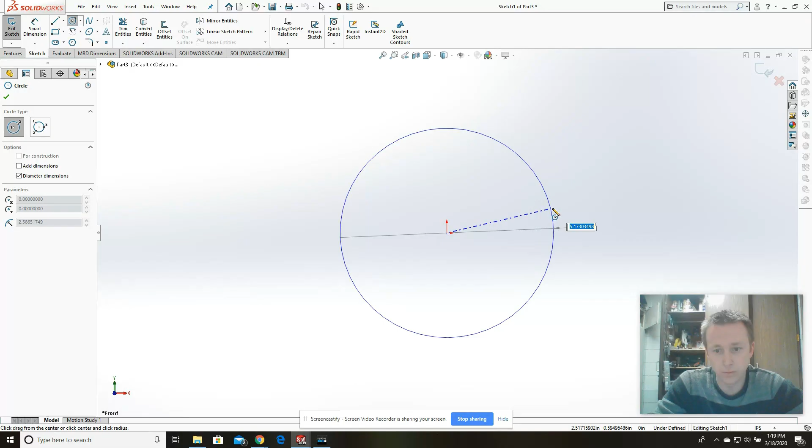I'm going to draw out a circle, then I'm going to dimension my circle because right now it's just whatever. I've already made the decision earlier what size I wanted this to be, and I went with 11 3/4 or 11.75 inches. Okay. Now that's going to change the size of my circle.

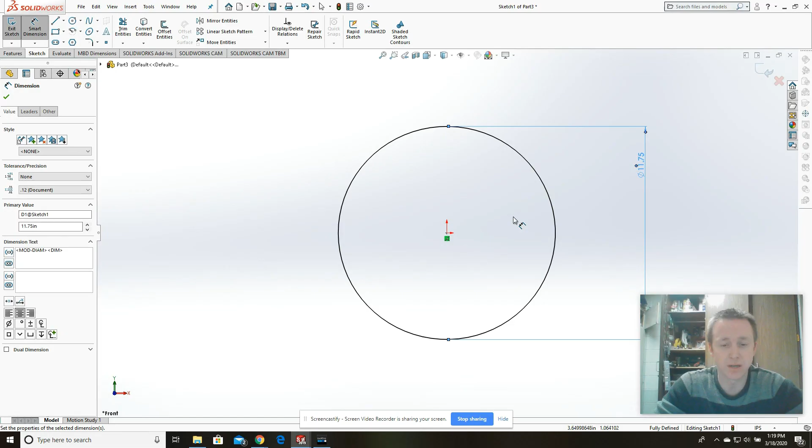I also am going to put legs around the circle, and to help me within this software program, I'm going to create construction lines. I'm not sure when I go to assemble my parts in here if those construction lines are going to show up, but I'm going to do it anyways because they're just lines to give you points of reference. They actually don't hold any kind of shape or value in the overall design of my product. So I'm going to go in here and create a series of quadrants actually so that it gives me a good sense of where my legs should be going.

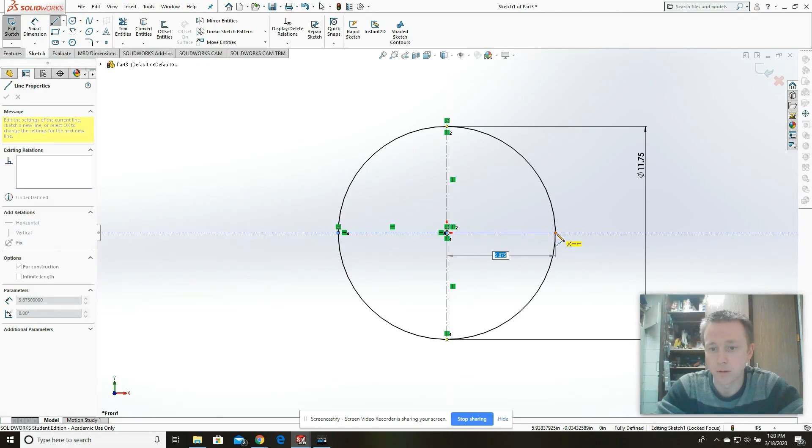Go here, right here. Try that again. One more. We should be good. Okay. All right, so there we have that. This is my 2D version. If we were looking straight down on top of our grill, this is kind of what it would look like. There would be bars going across here, but again, I'm not going to be putting those in for this drawing.

I totally could. Here, I'll just put a couple just for kicks here. I'll put one right here. And we'll put another one here. I'm not going to make it crazy.

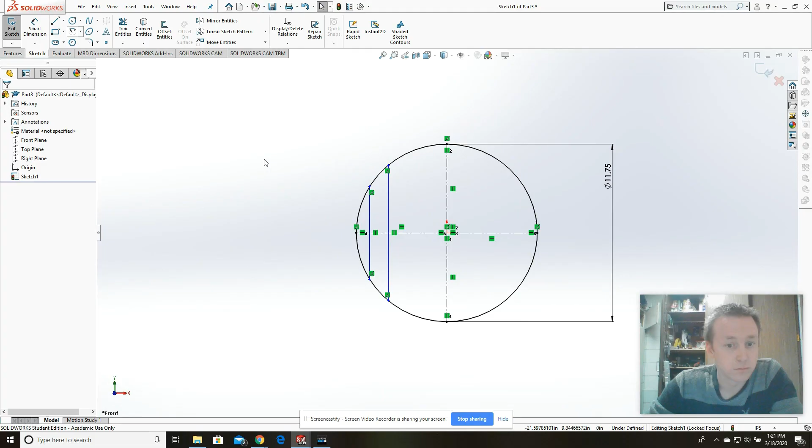And what I could do is smart dimension the distance here, and I want these lines to be, how thick should grills be? About 3/4 of an inch apart. Let's make it 3/4 of an inch apart. All right, and then I'll do the same for this one. All right, and then I'm just going to go down the line. Oop, there we go.

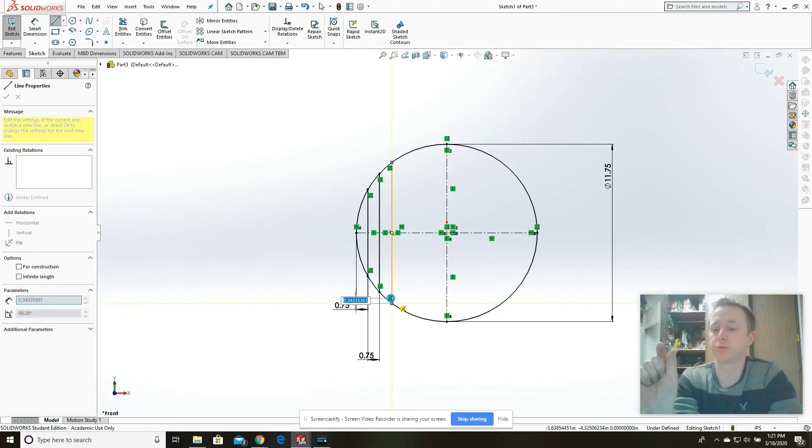Now there are a lot of quicker ways to do this. I can make half of this and then use the mirror function to get it to reach across, but I'm not going to do that right now. I'm just going to zip out these lines. My screen went black, but that's okay.

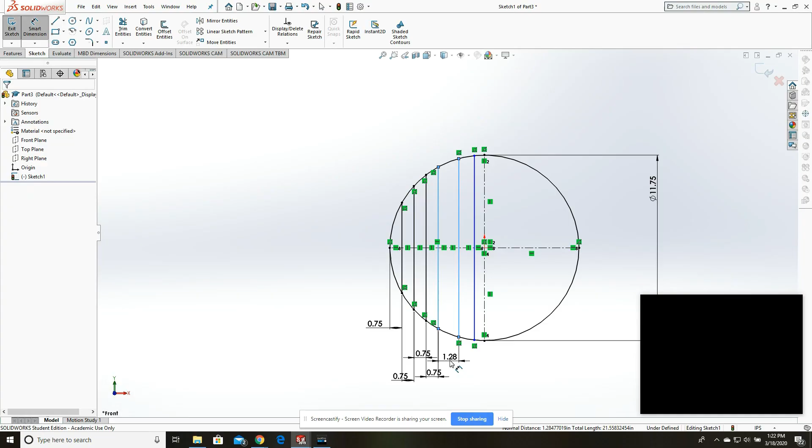I put the bars across. Like I said, I wouldn't, but I changed my mind. Went 3/4 of an inch all the way across with some lines, and then I ended up with something a little less than 3/4 on the end. That's okay. So I'm going to be done with this part.

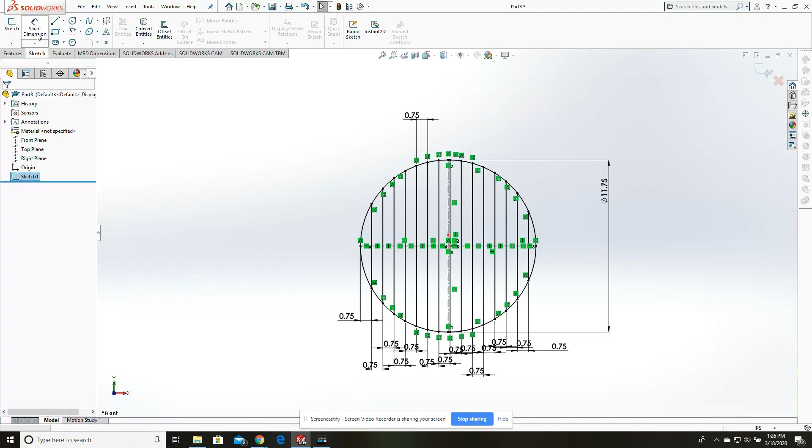However, this is just 2D, and I want to make it 3D. So I'm going to exit the sketch real quick right here, and then I'm going to give it some thickness. How we do that is we go to features and we extrude the shape. So as I'm here, we have everything highlighted, which is fine. I'm actually going to give it a dimension of 3/4 of an inch.

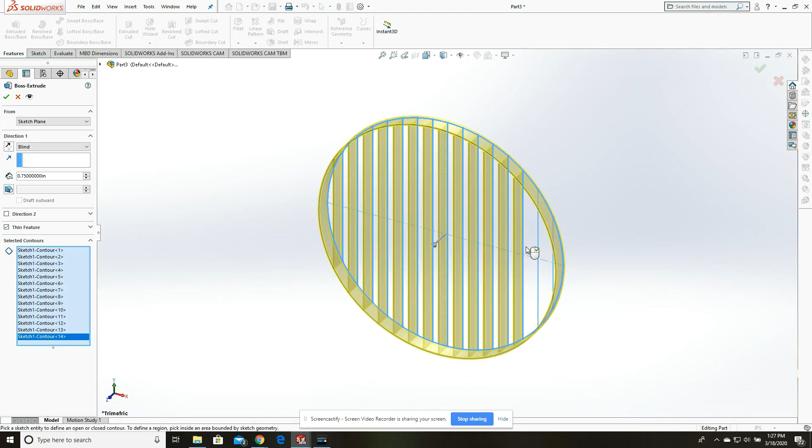Let me select all these here. So they all go to 3/4 of an inch. I believe my metal that we'll be using is 3/4 of an inch, but I'm not going to change its thickness or width, so it'll give me a good representation. So there's that. Check that off, and then we're left with basically a grill top.

Nice. I don't see my construction lines on here, so that's kind of irritating. Hopefully I'll be able to draw some construction lines later so that I can put my legs on in the right spot in this digital part. So

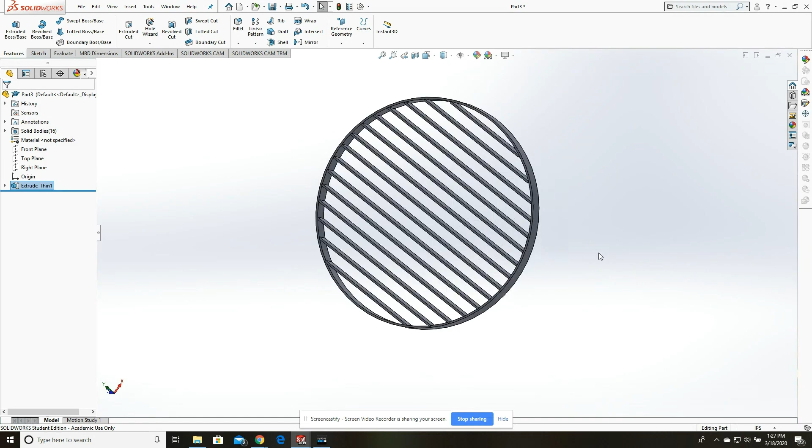And then we know how to make some legs. I'm going to have 4 legs on here, but what's nice is they're all going to be the same. So all I got to do is make one part, because when I put it together, it's just a matter of copy and pasting. So this gets a little bit different how I'm going to do this, but just follow along and you'll see.

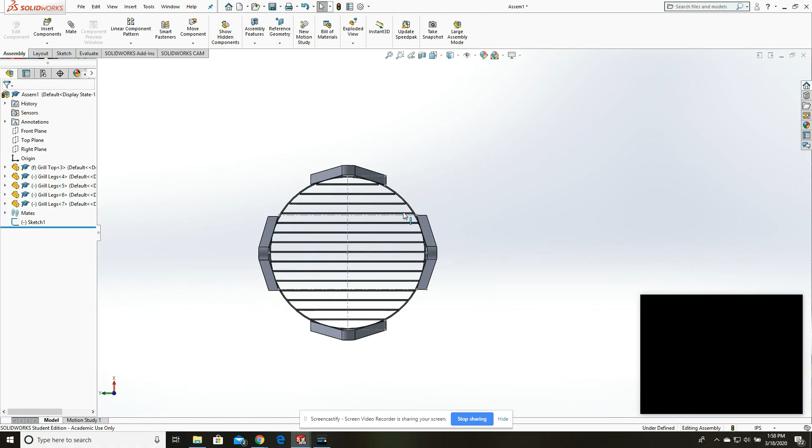I messed around. I brought in some construction lines to tell where I needed to put my legs. And now what I'm dealing with is my grill. It's pretty much put together on how I'm going to do it. Now in SolidWorks, it makes it really difficult. But when I build it, it'll be a lot easier than SolidWorks in my opinion. But

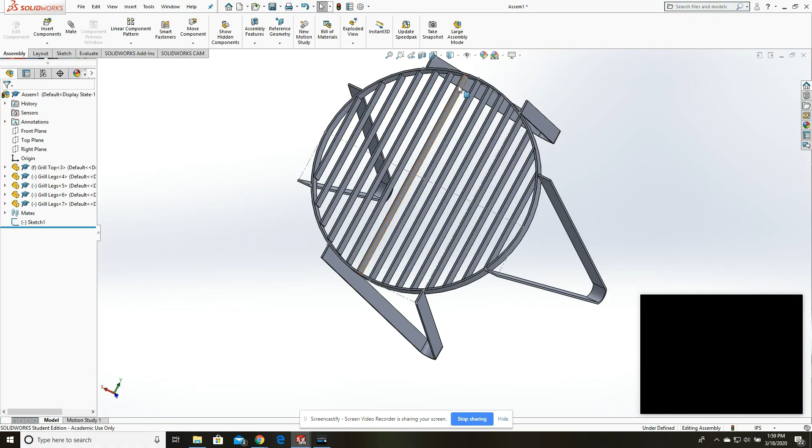otherwise, I'll probably add a handle in here or something on a set of these two legs, and maybe I'll put a couple of them or all four of them and just attach a handle. It'll look better and it won't look so goofy. But essentially what I was doing is I wanted to have this to create a drawing. So what I'll do is I'll make a drawing from this assembly. We want this. Okay.

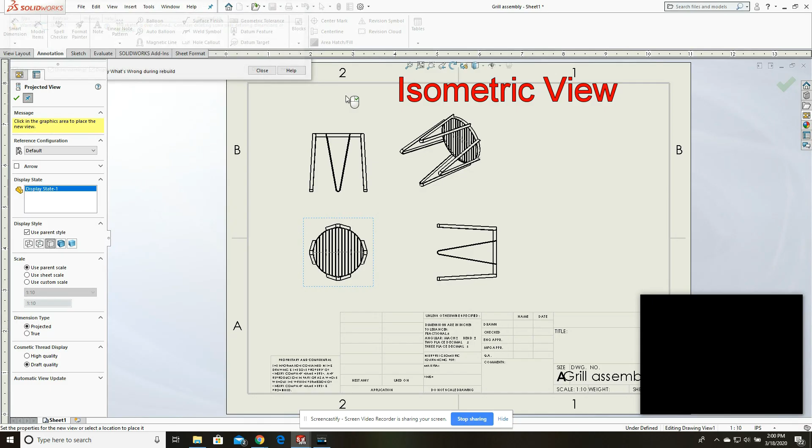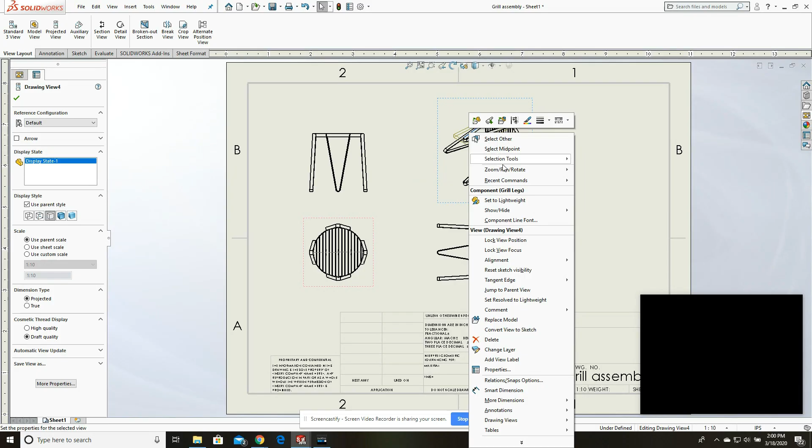Here we go. So what I'll do is I'm going to bring in some different views. This is called an orthographic drawing. A lot of you should be familiar with this, but basically it's a 2D drawing that gives you different angles and perspectives. And then this fourth one up here is an isometric drawing, which I don't like how this is orientated, so I'm going to rotate that. It shouldn't be too hard to do. Actually, can we find the rotation somewhere in here? All right, we'll just leave it at that.

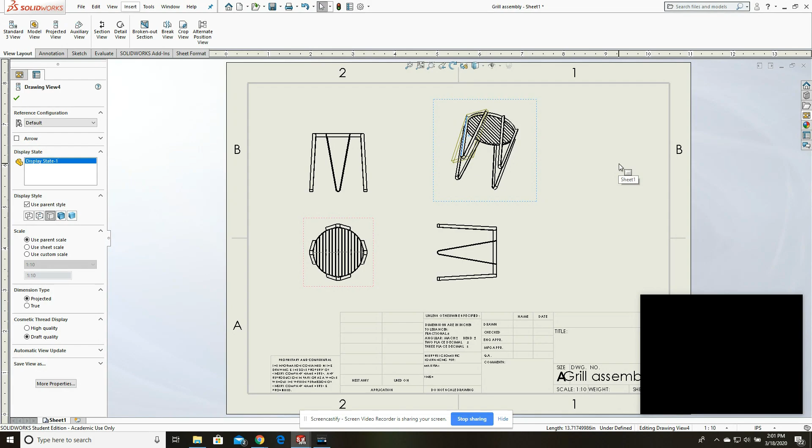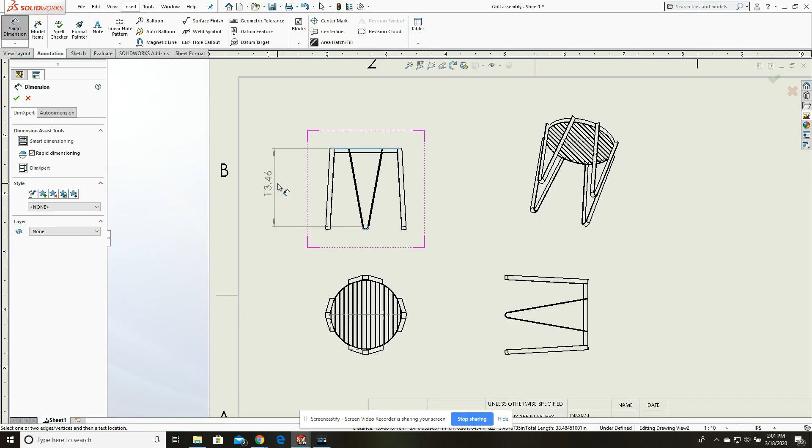So here's my grill. All right, now with this drawing here, I'll be able to add in some dimensions, and it's the same way as if we added smart dimensions. I'll be able to click on wherever I want it to measure from, like this top part all the way down to this bottom part, pull it out. So I got 13.46. Oh, looks like it's not pulling from the actual bottom. I wanted it to be 14 inches. So let's try this again. Go to the bottom here. There, 13.5, so pretty close.

Knowing the diameter is a pretty important thing, so 11.95. All right. It's nice that I can come in over here and override these values. This diameter is supposed to be 11.75. See, and the value changed there. I wanted this to be 14 inches, so I'll override what it's telling me. 14 inches. There's always a way around it here in SolidWorks.

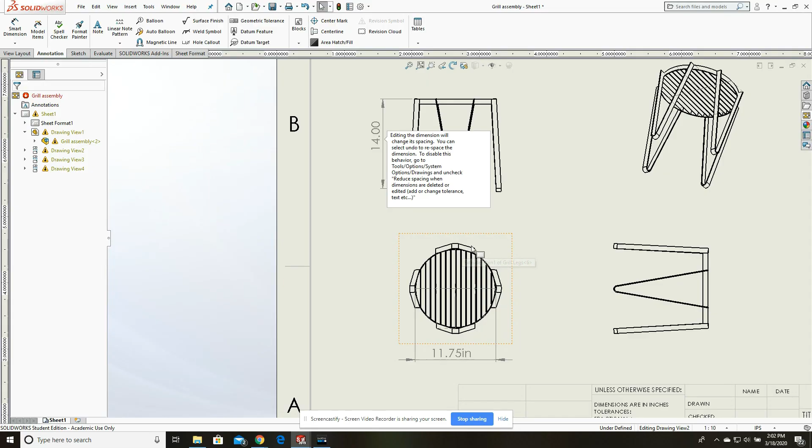And then my legs, I'm pretty much going to bend them to fit and make sure they're all bent the same. And that should be good. I guess I'll get my overall width too. I guess it should.

All right, everyone. So I have my plans here for my grill. I'm going to make it. I'm calling it the Campfire grill. I didn't really go into depth with SolidWorks. I had some trouble, as you can see. It's just one of those things with SolidWorks. Never built it before, so I was kind of learning about this circle, and mating these parts made it kind of difficult. But I was able to figure it out to get my shape and make it symmetrical on what I wanted to do, and all that.

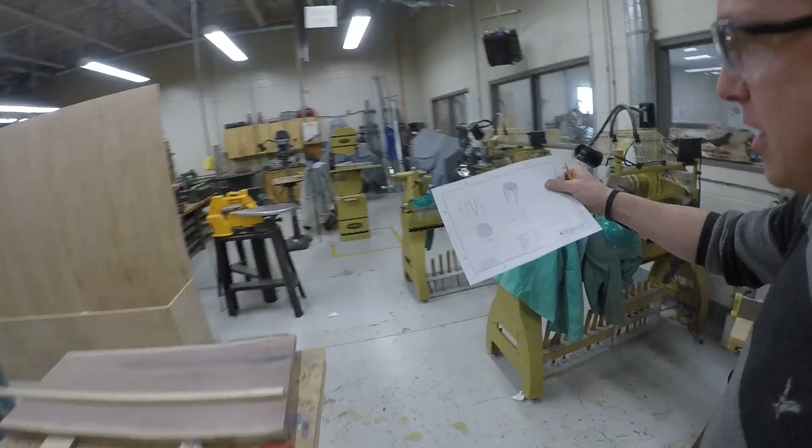So I get the general idea. There are not a lot of difficult parts on here, so the SolidWorks, yes, it helps. I just wanted to give you an example of pretty much how we do that. But another example, you see this giant middle school trophy case, and this is where SolidWorks plays a nice hand in that. And I'll be going over this project eventually sometime with all this online stuff.

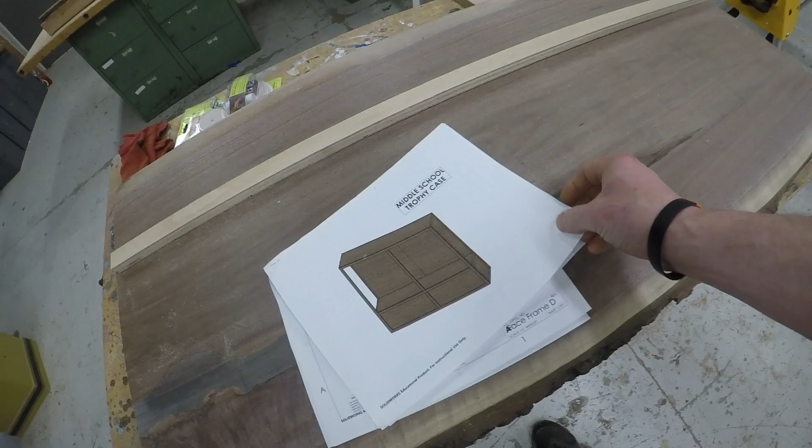But if you look, here I have, you can add skins to it, and then I have it broken down in different assemblies, giving you all these little nooks and crannies, squares, I have it all defined. Here's the casing, here's the face frame, and it just keeps going. And then every page is a part that needs to be built for this. It's a little more intricate, it has a lot more parts than this grill. But that would take a very long time to put in one of these videos, so I won't do that to you because I know that that SolidWorks part was probably a little stale for you.

But so here's the deal. What I'm gonna do is I'm gonna create this grill, and you're gonna watch me create it. So pretty much what I'm gonna start off with is the main part, the grill. The main part on that is creating a circle out of metal, and then we're gonna weld those together. We'll create all the crossbars, which is gonna be a lot of cutting, a lot of welding, and then I'm gonna create the feet for it, which actually is probably gonna be the easier part of the project. So, there we go. Let's go select some material.

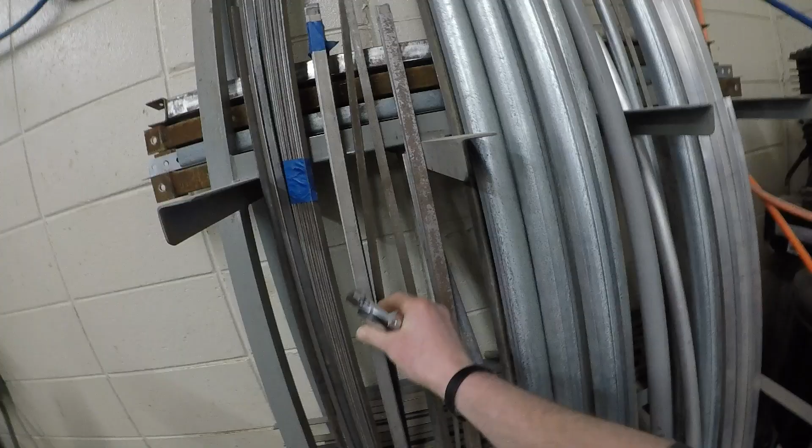All right, here I have a lot of metal material to choose from. Obviously, I'm not going to use these giant 50-foot, well, it's 50 feet worth of metal pipe, galvanized. Don't really want to work with galvanized stuff. It's toxic if you weld it, so I don't want to mess around with that stuff. But I do have a lot of these mild steel strips. Some are thinner than the others, but I have a lot of this stuff right here. And this actually, when I was looking at it, I wanted 3/4 of an inch. I'm gonna take this caliper here and try to figure out.

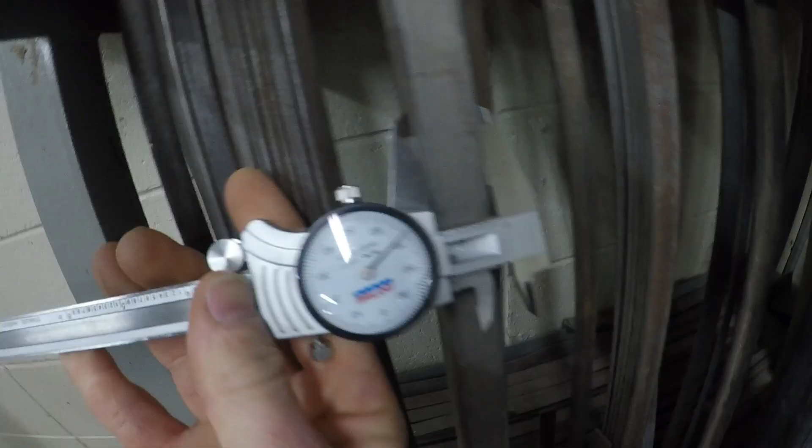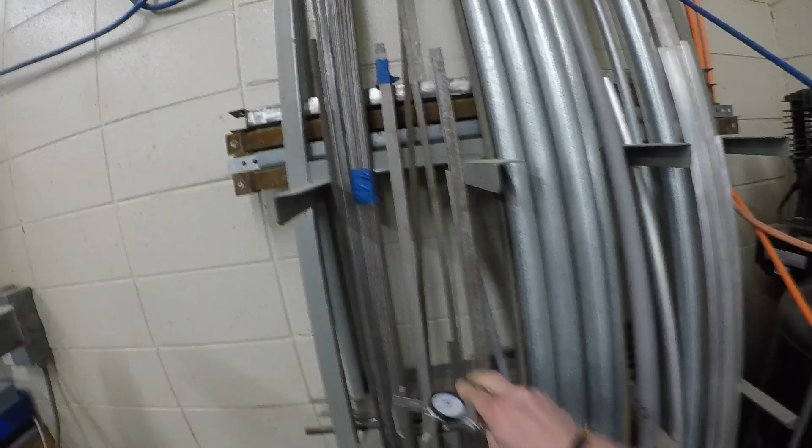Alright. And that's pretty close to 3/4. It's a little bit more. It's about 20 thousandths bigger than 3/4. And I'm not getting an accurate measurement with the camera here. But this is my material. It's a little thin, but it looks like grill material to me. So we're gonna bend up this stuff. We're gonna make the legs out of this. We're gonna make the grill piece out of this.

So this is 3/4 inch, 22 gauge, or I'm sorry, 16 gauge mild steel. So it's easy to work with. I'll have to treat it and rub it down in order for it to be used as a grill. You don't just want to use anything as a grill in case there's hazardous chemicals on it. But pretty much I pulled some aside. I have some right here, and we're gonna make our circle.

Here we go. All right, so I have some material here. I gotta find out how long do I need, or how much material do I need to create this circle. Well, one thing is I know that I want my circle to be a diameter of 11 and 3/4 inches. And I lost my tape measure. I'm gonna go grab my tape measure.

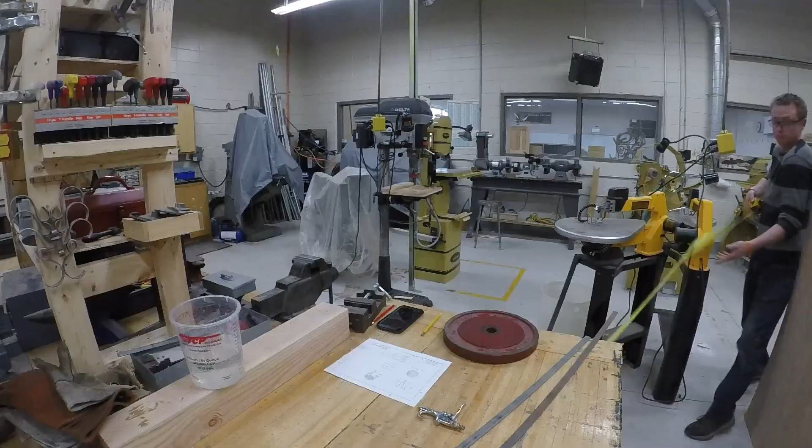All right, got my tape measure. Usually you don't use this for metals, but I'm just trying to get a rough estimate of how much we need. I'm actually gonna cut the metal longer than what you'd actually need. So I found this weight here. It's 25 pounds, and I'm gonna use this as kind of my template to create my circle.

What's nice about it, it's 11 3/4. So I'll be able to wrap, and I'm gonna use a hammer, and I'm gonna bend this metal all the way around it to create a nice perfect circle to shape it. So this is a part of metallurgy, is shaping metal, bending it to get a desired design or shape. But I need to know its circumference. I know its diameter, that's helpful, but what's its circumference?

Math. I gotta think way back. Math. Oh, I know. The circumference is equal to 2 times pi times the radius. I knew I'd remember that. So, all right. I'm gonna use a calculator to figure that out, but if I take this and I take the radius, which would be 11.75 divided by 2, that would give me 5.875, which is 5 7/8.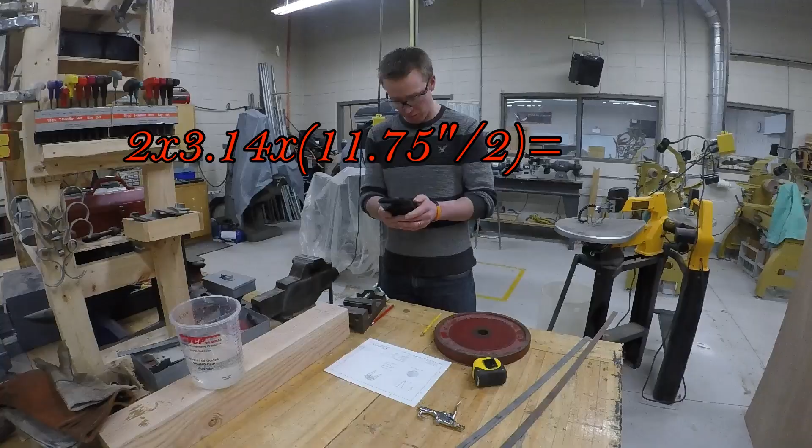So I would take that, I would multiply that by 2, and then I would multiply that by pi, I love pi, and that gives me a circumference of 36.9 inches. So let me write that down, 36.9. I'm gonna test that out. I'm actually gonna tape my flexible tape here, and it doesn't like to bend all around things, just one bend, so it might break. It has some points of breaking around here, but I just wanna see how close I am and show you that math works.

I said 36.9, I'm right at 37 inches, so that's pretty cool. I don't have to break my tape measure to figure it out and get a rough estimate, because that's not an accurate way or precise way of measuring. Math is. So 36.9, great. I need at least 36.9, I'm gonna round that up, 37 inches of material in order to create this circle. So, got plenty of stuff here. So let me readjust, and you'll see me cut this up.

All right, so I made a mark at 36.9, 37 on my metal here. And what I'm gonna do is I'm gonna use this scribe, which is what you use on metal instead of pencil, because pencil doesn't show up. And then I'm gonna use this cute little square. Yes, it's not a square, but it's part of a square, and it has a 90-degree angle on it. The method's called scribing. I'm gonna scratch a little mark on there. And then that'll help me see where I need to cut this thing. There we go. So let's take this over to the bandsaw, and we're gonna cut it.

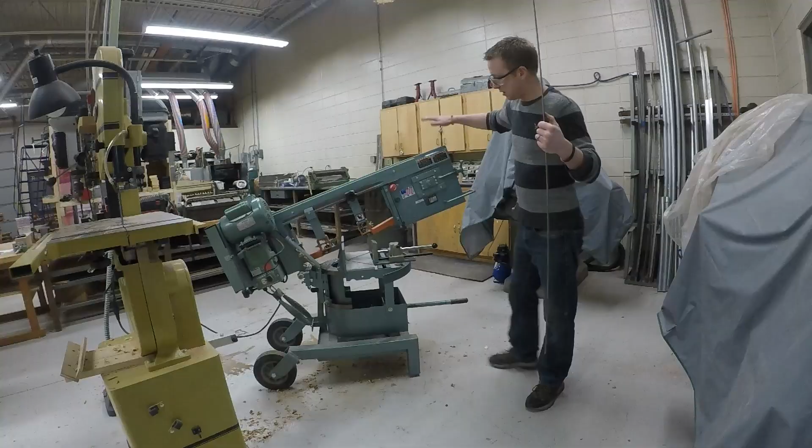All right, this is our horizontal bandsaw. It's an awesome machine. It's got a really thick blade on it. It's like bandsaws, where it has two wheels and a big band saw blade on it, but this is horizontal. And this is not like your vertical bandsaws where you can cut curves and angles and different things. This here only cuts kind of like a miter saw. It can only cross-cut things or cut them straight on. There's no turning around or creating curves. I can change the angle where I can cut what's called a miter cut, but in this case I just need a nice square cut, so I'm going to use that for this.

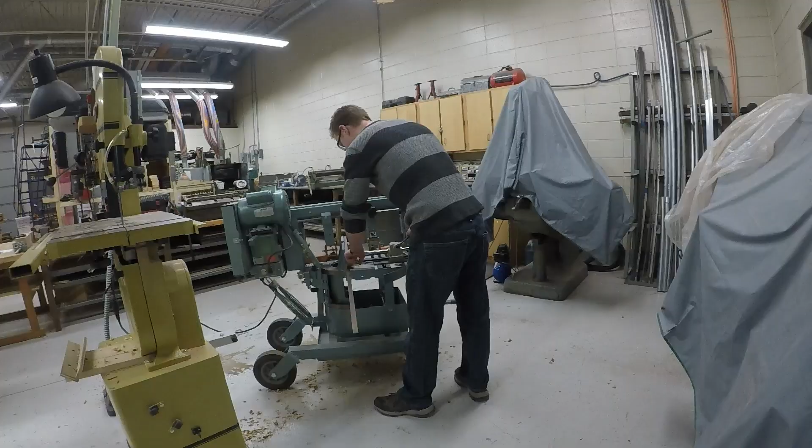So I'm going to load it up in here, get my mark close. Here's a little clamp that has a cam on it. I'm not going to clamp it yet. And then there's a bleed valve to help me lower my blade. Let me get it super close to my material, line it up with my line. I can turn it on. Won't turn on. Oh, the E-stop is pressed. Now it's running, and now, make sure this is connected. I can go ahead and open up the bleed valve and get it to cut.

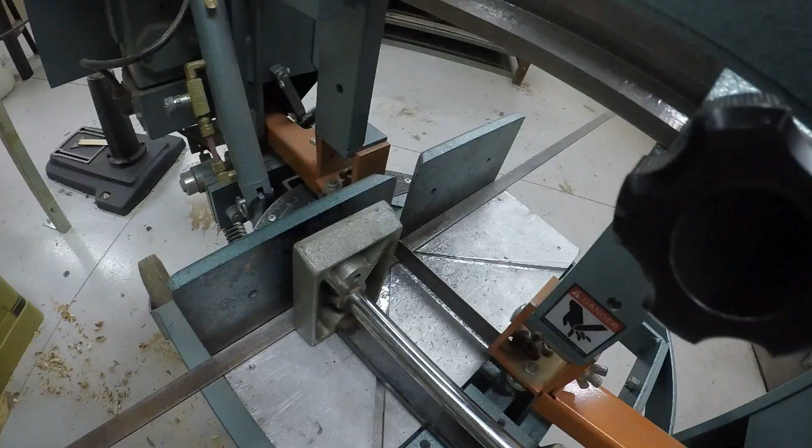I like to keep my hand over here to kind of control it, another level of controlling it. So it's coming through the metal right now, you can't see. There it is. I can stop it here. Should stop on its own. Didn't right there, but there we go. I have my piece.

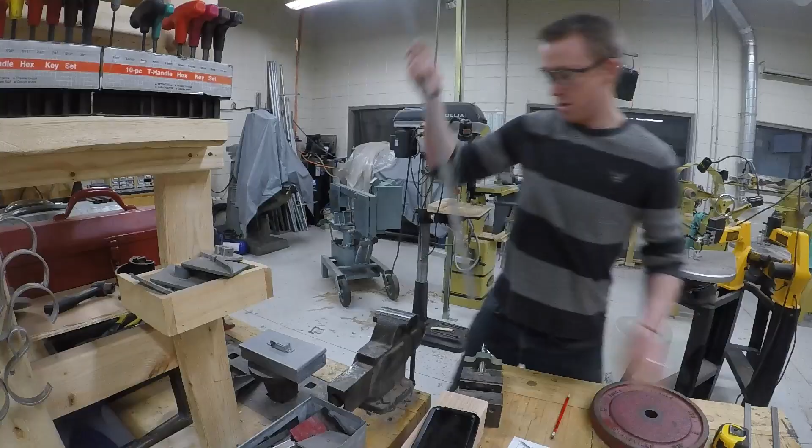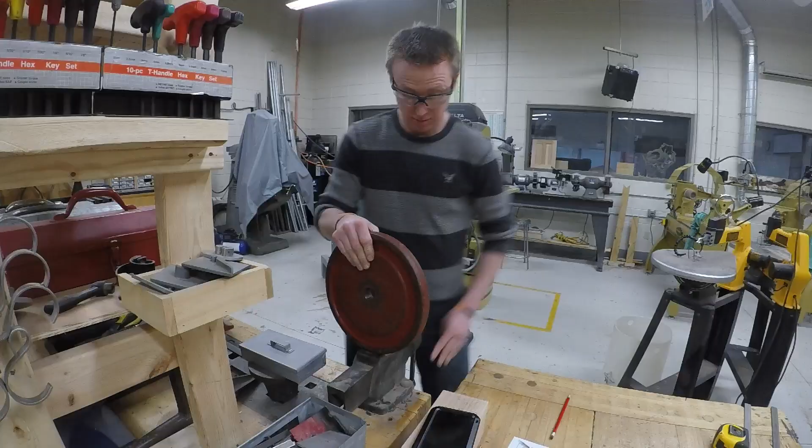Alright, so now that I have my piece here, double check, make sure I grabbed the right one. Now I need to shape this into a circle. So, like I mentioned before, I'm going to use this as a gauge or a kind of template, I'll call it a gauge, to shape it. So this is a tool. I'm using this as a tool. Yeah, it's a weight, but it's a tool that I'm using to get my project done. So hint, hint. Also going to use a vise. A vise is a great tool to have to help you hold things. It holds things a lot better than you can, or I.

Make sure it's in there nice and tight. And I'm going to use this maul, could use a ball peen hammer, any type of hammer, but this is nice and heavy, and I'm just going to bang this around my shape here.

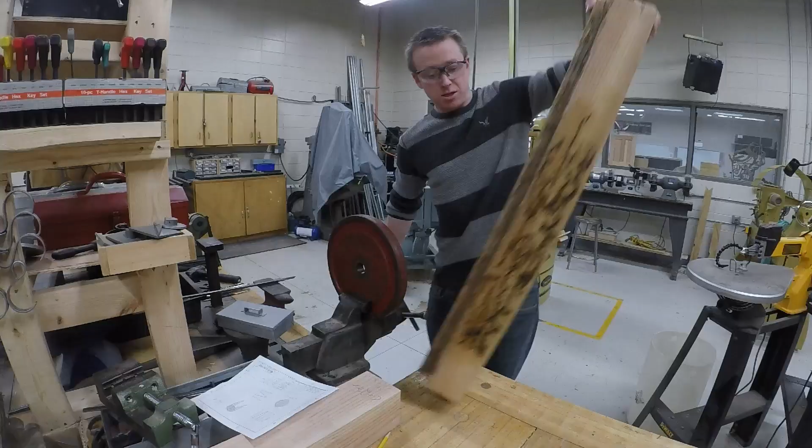Hi, Mr. Dunlap. Oh, dude, sorry. No, that's all right. All right, Mr. Dunlap came in to say hi, and then science teachers just came and left. We did a Lichtenberg test, or you might have saw before you left. I was showing them how to do that, so I got a little sidetracked.

But I was able to bend this enough. I'm able to get this pretty close to where I need it to create my weld. Once it's welded, then I'm going to take a blowtorch. I'm going to heat all this up, because when I put this together, there's a lot of tension there. It wants to open back up and return back to its shape.

So what happens when you heat it up is the atomic structure of your metal realigns, and then it'll think that this is the shape it should be in. There's a little more to it than that, but in a nutshell, that's what it is. So I'm gonna get this together. I'm gonna have a clamp help me out, hold it, and I'm gonna weld it. I think it'll be good.

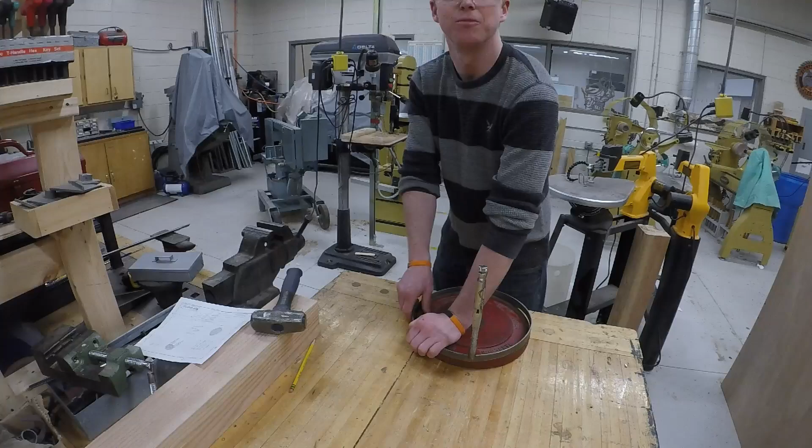So what I got going on here, took my weight off and put a clamp where the seam's gonna be, and then I'm just trying to take out any little imperfections here. I have two little humps. Just made it easier to bring it down so I can look down at what's going on. I want to be careful because this might pop off and then the thing's gonna pop open on me, but I got a clamp pretty tight, so it should be good, but you never know. So I'll set this a little bit and just make my adjustments.

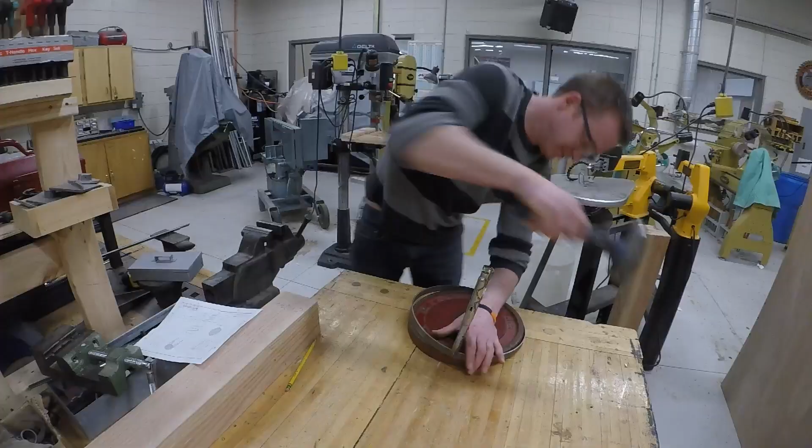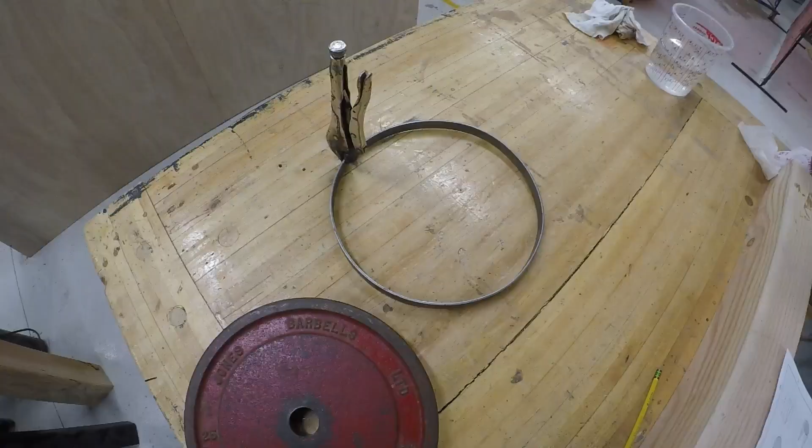I have a pretty good circle here for what I created in this hoop. So now I'm ready for welding. All right, I'll be over here a lot for this project. This is our welding booths here, if you're not familiar, and I have 3 different types of welders. The one I'm going to be using for this project is called a MIG welder, or GMAW, some people call it. It's gas shielded metal arc welding. So I'm going to use that.

This one's nice because it self feeds a wire out, a filler rod, and the electrode that you need, and it's really nice for tack welding. Basically what I'm going to do with this joint is tack weld my hoop right here so that I can get rid of the vise grips. I don't want to weld the vise grips. That way when I remove it, it'll stay together, and then I can finish the weld, and I want to weld all the way around that joint to make it solid. So it's nice here. I can put this here, holds it up for me.

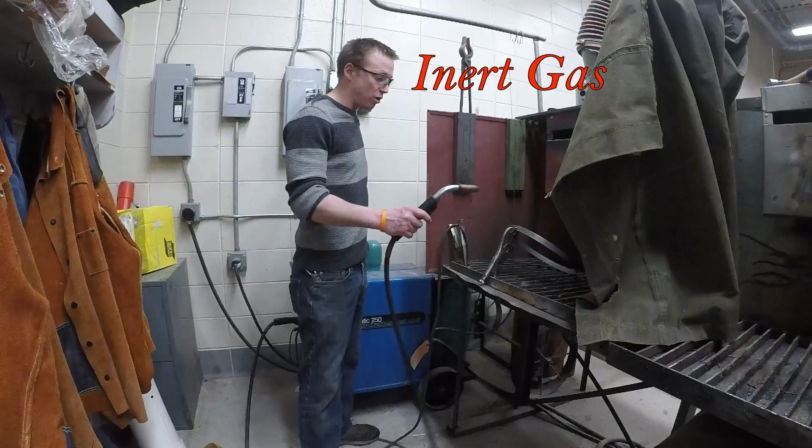When I turn on the machine, I will use this curtain to get out of the way. I need to get dressed up here first, and then I'm going to turn on the machine. I got to turn on gas. It's an inert gas, so it's not flammable. And then I'm going to turn on the exhaust system, because when you turn metal into molten metal instantly, there's some fumes that come off, and it's toxic. You don't want to be smelling that. So we have a really good ventilation system here. It sucks it right up these tubes, and away it goes.

So yeah, I'm gonna get dressed up here. Give me 1 second. All right. So I'm all ready to go.

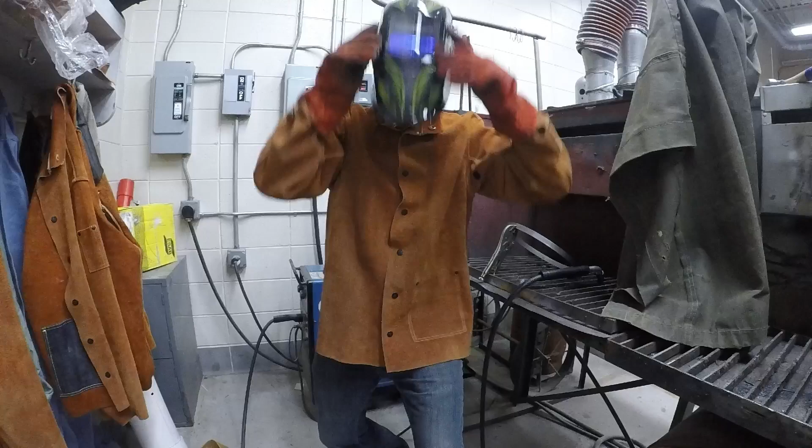Like I said, with the molten metal, it can spray out, or it can go in other places besides the weld. So you gotta have leather. Leather does the best; it's not gonna melt through like polyester would. So this is safe. I got my gloves on. These are nice welding gloves. They're really thick and insulated because this stuff gets super hot. You don't want to be touching anything.

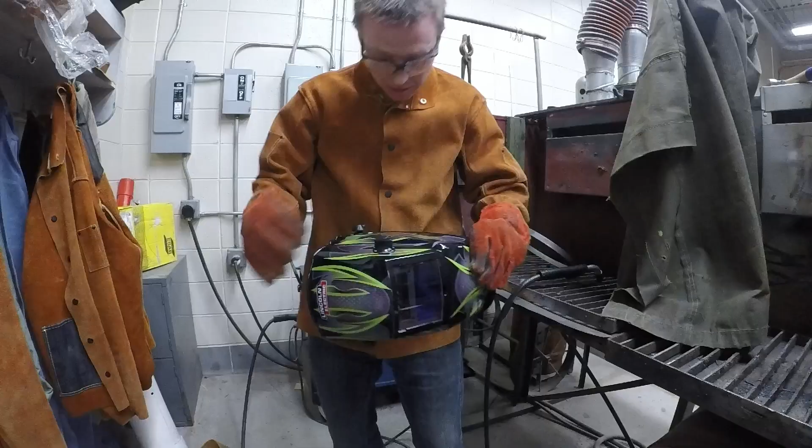So in the shop, when you wear gloves, you're on the metal side of things. You don't wear gloves on the wood side of things. But keep your safety glasses on. But I also have a welding shield that has a level 10 shade over it. Actually, this one is a self-adjusting one, and I can change the settings on here. So I want to double check that it is on number 10. And that way it's ready to go.

So I'm gonna turn everything on. It's gonna get loud. You're not gonna be able to hear me. I'm gonna move the sheet across. You'll see a light, a flash. I'll be okay, and I'll move it across, and then we'll take a look at my weld. So here we go. On goes the gas. On goes the exhaust. On goes the machine.

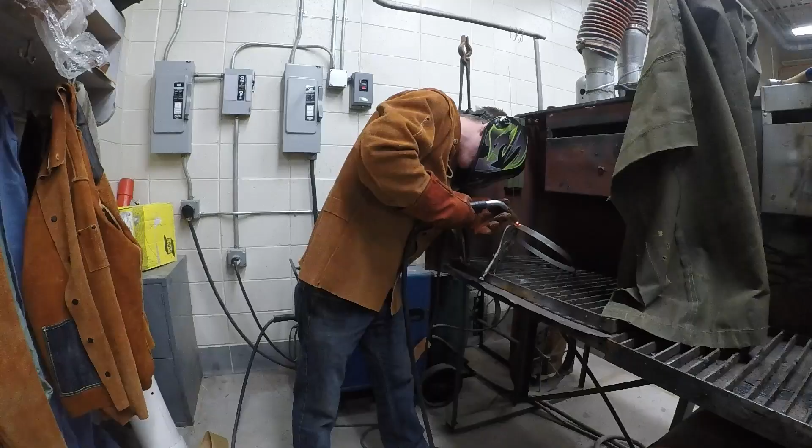So hopefully that didn't blind you. I forgot to cover this, so we'll see how that goes. I don't think it can hurt the lens, probably be fine. Hopefully my body was in the way and you didn't see that.

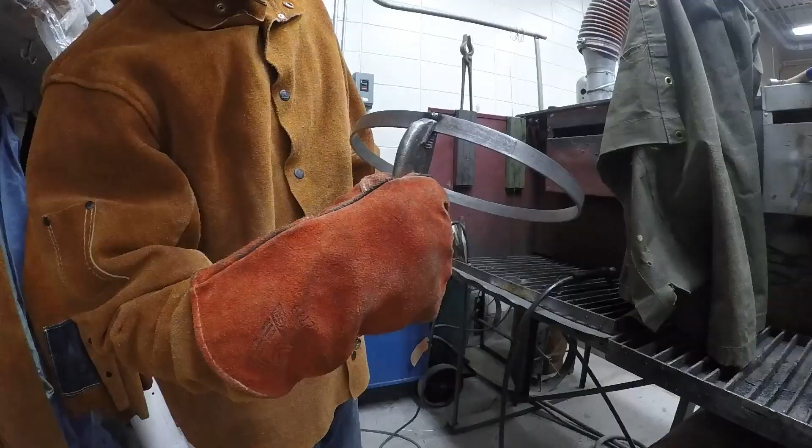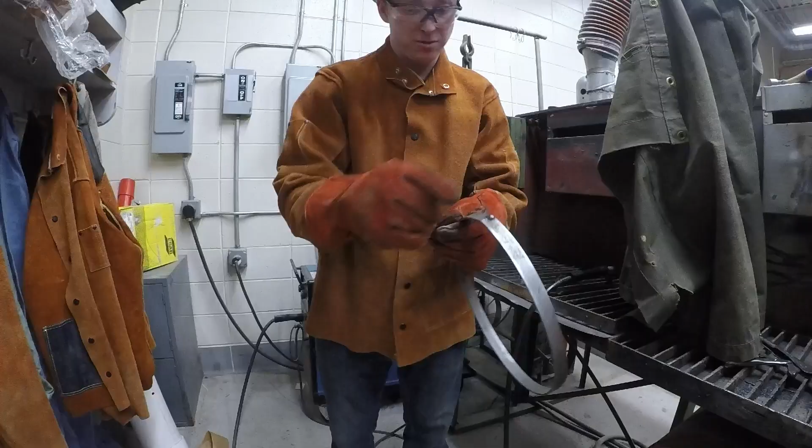But anyways, I have a tack weld. Nothing too pretty, just a big old blob right there. And what I'll be doing is I'm gonna finish the weld and then I'll grind that down so it looks like part of the band later. So now hopefully when I take this apart, it doesn't fall apart. Well, it passed the drop test. So I'm gonna finish that up before it opens up on me. That seems like a good weld.

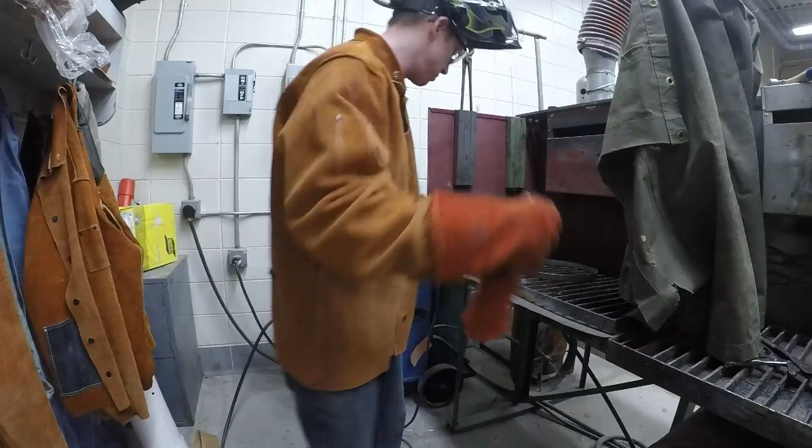Not gonna be back here for a little while. I'm gonna shut off the gas. Always shut off the gas. The gas I'm using is 75% argon and 25% carbon dioxide. Just a non-flammable gas combination that works well with this type of welding. So, anyways, I don't want to touch that end because it's super hot, so I'm gonna quench it.

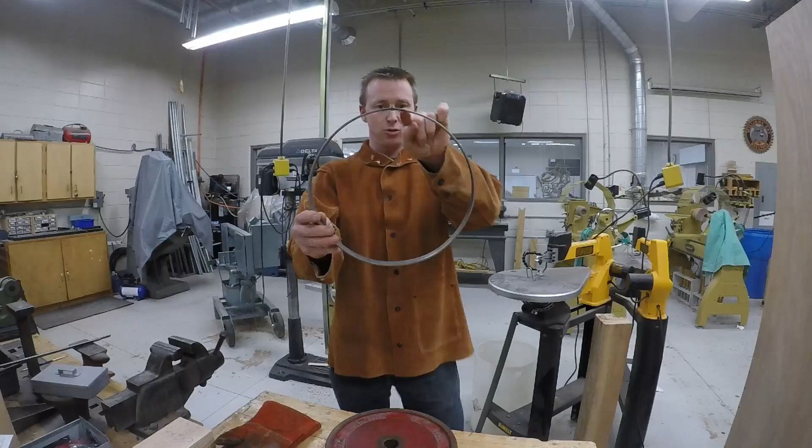I got my hoop. There's tension here. I bent it a little bit so there wasn't so much of a rigid corner. Of course, I have my welding marks here, still a little warm, but I'm gonna go grind it down a little bit. I don't want to destroy the weld or break it, so I'll probably leave a little bump there, but I just want to grind out this huge hump that I have going on, and use the bench pedestal grinders because I like using that. Great tool.

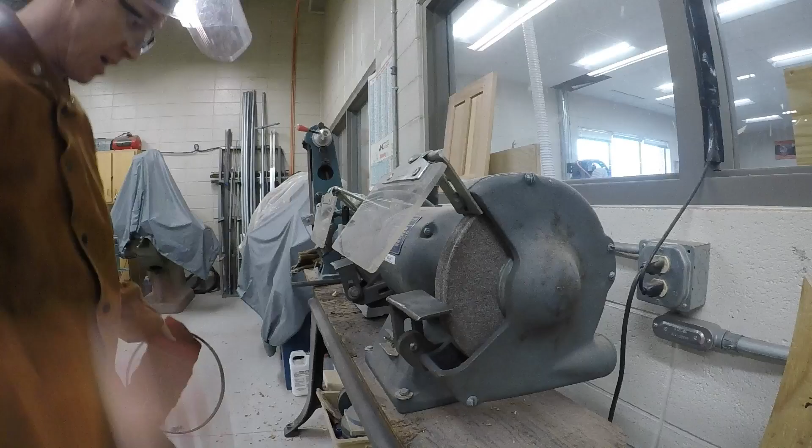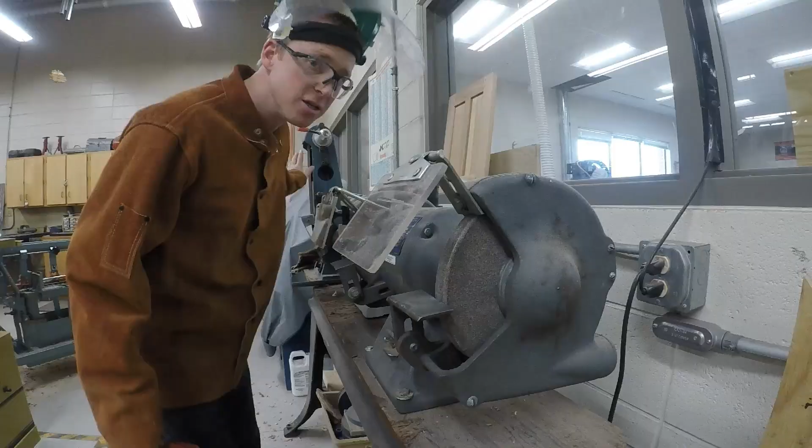All right, these are our bench pedestal grinders. It's on a pedestal, on a bench. Here's the grinder. I have a series of them. This middle one I use for sharpening tools, so we don't use that for grinding raw metal. The other one has a wire brush on it and a belt sander. This belt sander is only for metal, not for wood. But then I have this grinder here that we use 90% of the time, and it has a coarser wheel here and a finer one here.

For the sake of this video, I'm just gonna use the fine side, but you always wanna make sure that there's no cracks going through the stone, which is what this is called, because it could explode. When it spins, this one goes 3,450 RPMs, rotations per minute. So it's spinning really fast, and if the stone explodes in your face, you better be well protected, or better hope that doesn't happen. So that's why we inspect it. It takes 2 seconds. It appears good to me.

Always want to keep your guard down. If there's a guard, use it. I'm also going to wear a face shield. I'm going to wear my safety glasses. I'm going to wear gloves. So lots of layers of protection with this machine. Okay? Here we go.

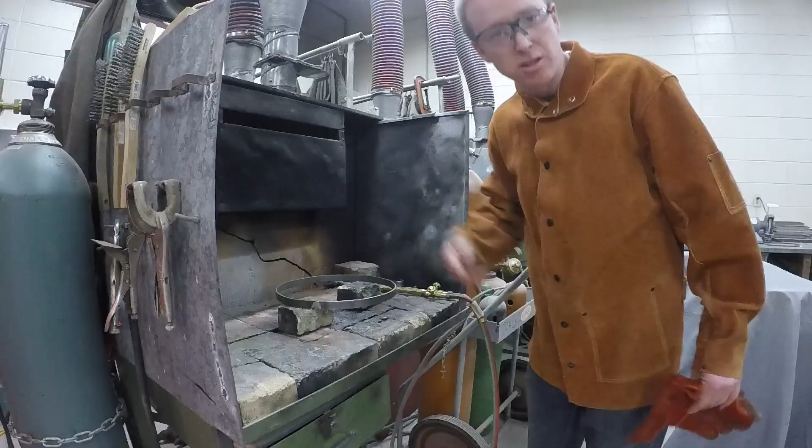That's it. That's grinding. So as I was saying earlier, I wanted to heat this hoop up because there's tension here. It doesn't look like it. It looks like it's totally fine. But I know because I bent it from its original form that there's some stress, atomically speaking. So down to the atoms, they're being stretched and pulled, which metal can handle, but I don't want it to always be under that stress. It's not good for the longevity or the lifespan of my campfire grill.

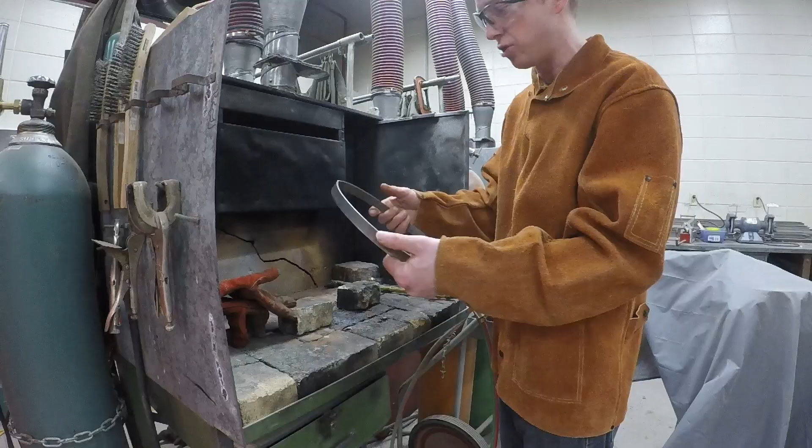A lot of you metals people know about this already, but for those of you who've never seen it or don't know what it is, I have oxyacetylene. So this is oxygen, okay? And this is acetylene right here. Both of these things are off. They should always be off. I have directions on how to turn it on, but there's actually a sequence. And this is probably one of the more dangerous machines on the metal side of things because the gas is very flammable, oxygen especially, but acetylene is too. So there's a sequence you have to follow when lighting these things up.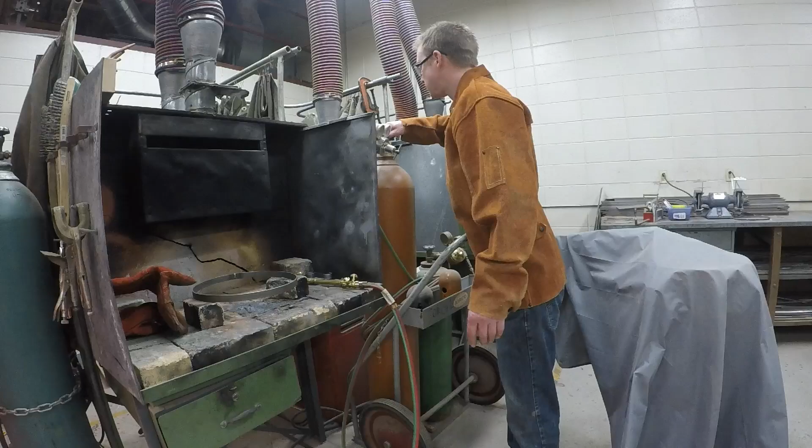I'll do the sequence. I'll talk about it, but I'm not going to get all deep into it unless you take metals. Take metals, we'll get into this kind of stuff. All right, so first thing I'm going to do is open up the oxygen. Okay, then I'm going to turn the acetylene a quarter turn. That's 15 minutes. That's it. Don't need to do much more than that. Again, we need gloves.

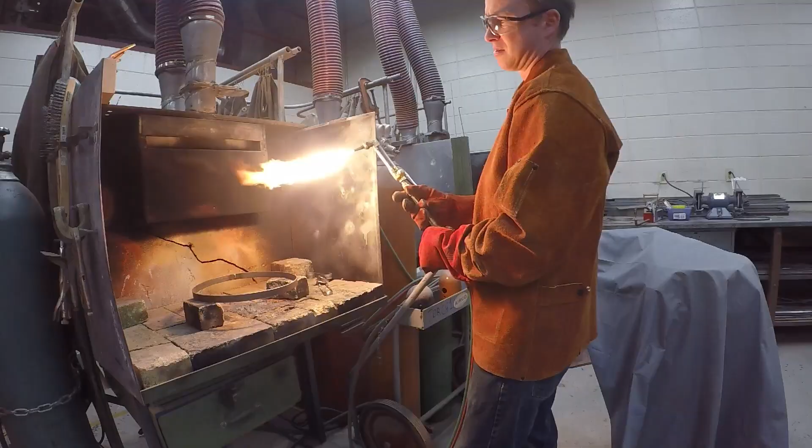On my torch handle, oxygen is the green coming in, and acetylene is the red coming in, okay? On the torch, it's gonna be a little different. I'm gonna slightly turn the acetylene. I'm gonna light the acetylene, so then I'll have a flame going, and then I'll start to add the oxygen as I go. Okay. My sparker's ready. Here we go. Acetylene's going. Now there's gas in the air. A little too much acetylene. Maybe a little less. I like to wait till I see a bunch of soot. I should have the exhaust going, but I'm not going to because I'm not going to be doing this long, and it gets kind of loud.

Now that I see that soot coming off, I'm going to start adding the oxygen. Open up this one. This is also a secondary oxygen valve. And you get it to a point where you see these blue cones. I don't know if you can see it on the camera there, but there's these little blue cones on the end of your torch, and that's how you know it's good. I can also use this regulator here, this check valve, to add more oxygen, and this can be used for cutting metal as well. I don't really need that for what I'm doing here. I can if I want to get it really hot really fast, but I'm not going to. I'm just going to go around my hoop here and heat it up.